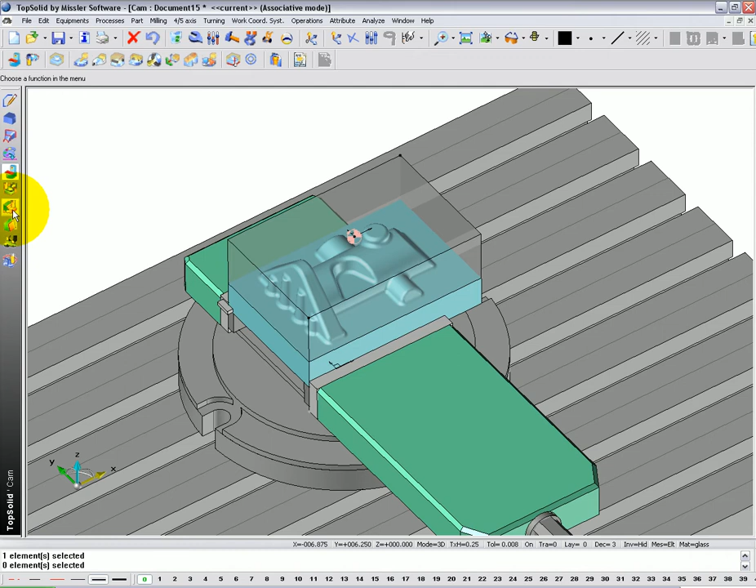In this first operation, we're going to apply a roughing routine. To get started doing that, simply click on the 3D milling icon in the navigation bar and then choose the roughing icon. Let's double click on End Mill, and here next to tool diameter, let's type 1 and hit Tab. This will filter through all the available tools and just show the 1-inch diameter cutters.

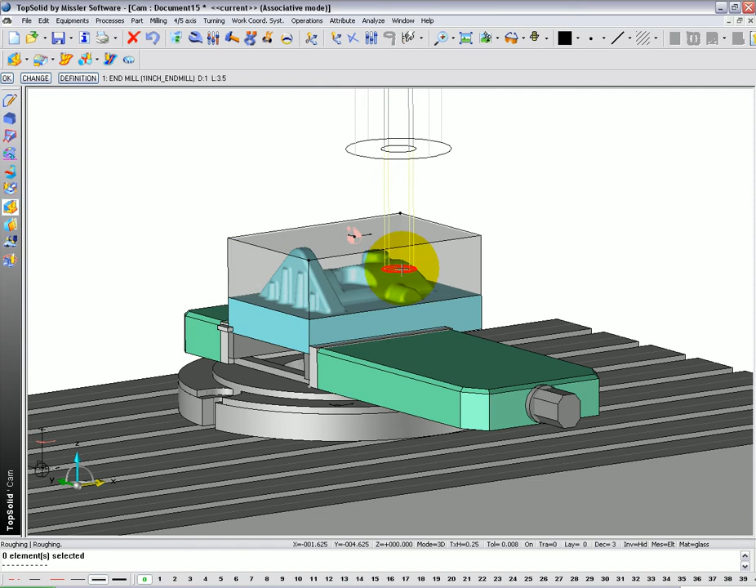Let's say OK. The first thing you'll notice is that you'll see the tool walking around the screen following your cursor's motion. This is a simple test that you can run to make sure that you have enough cutter length sticking out of the holder. When you're ready, click OK.

Let's set our stock to leave at 30 thousandths, leaving a tolerance of 10 thousandths. Let's set our Z-step to 1/2 inch. Next, let's turn on intermediate pass management, and let's set our minimum Z-step here to be 0.1. Now let's go to step over and set that to 0.4. And let's just see what it does.

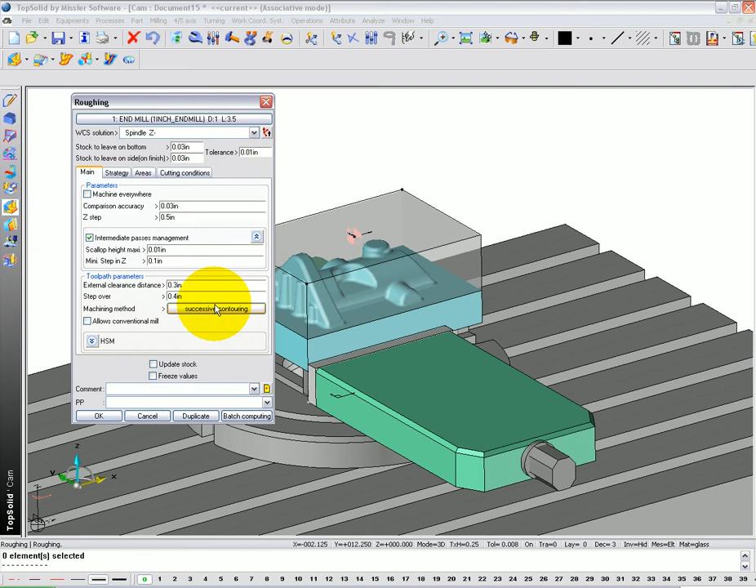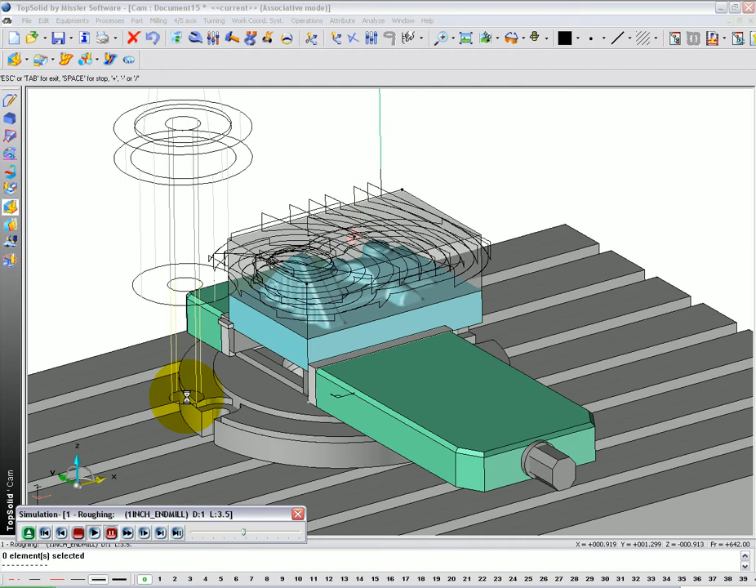At this point, you're seeing a simulation of the toolpath. You can speed it up or slow it down by grabbing this bar down here. You can also use your plus and minus keys to speed it up and slow it down, or hit spacebar to pause. When you're done, you can right-click to get out of it, or just wait for the animation to end.

Let's click on the Operations Manager and click the eyeball next to where it says Roughing. This will visually turn on the toolpath so you can see it. Notice we have our 1/2 inch main steps and then these 100 thousandths steps. Let's see what that actually does.

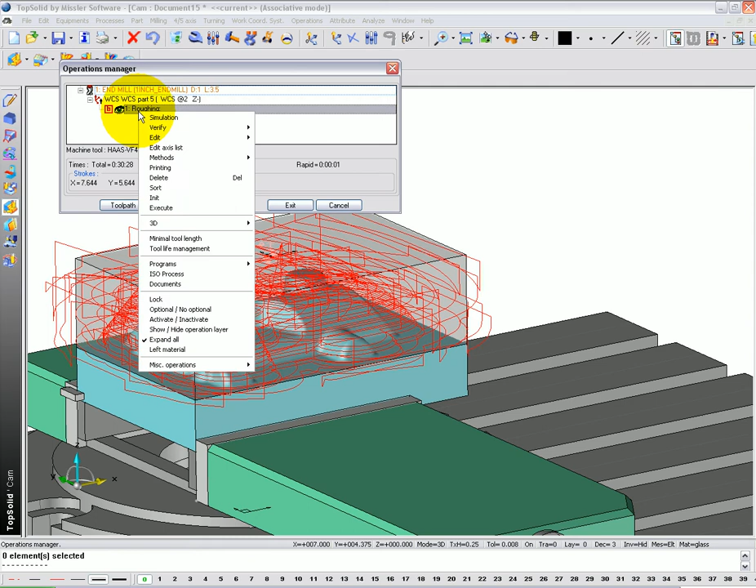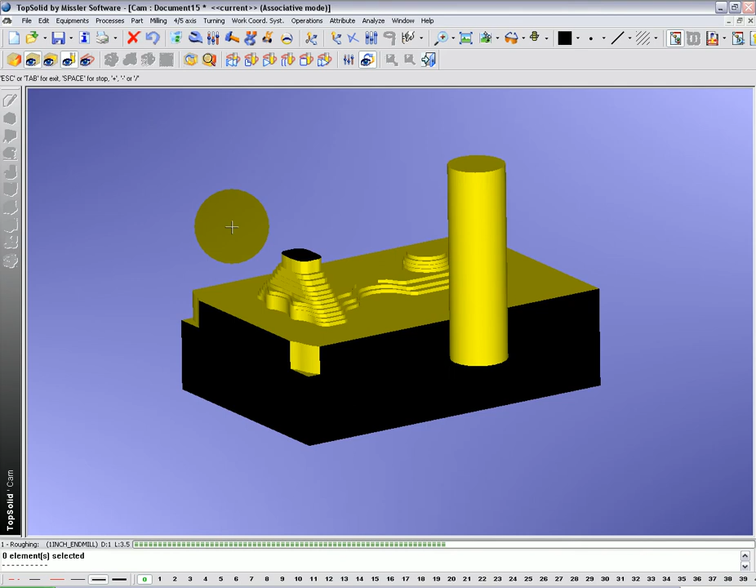Go back into Operations Manager, select the operation, right-click, choose Verify, and now hit the play button. You can also use your plus and minus keys to speed up or slow down the verification here. Notice that the toolpath is actually roughing backwards up the part after it's taken the main 1/2 inch depth of cut. This is to remove material as efficiently as possible, yet still sculpt the part during the roughing cycle. When you're finished with Verify, hit the little Quit button.

Now, let's maybe go look at the roughing operation and see what other kind of options we can turn on. To do that, just simply double-click on the operation. Here, let's activate high-speed machining. And let's turn on trochoidal loops. We're going to set our loop pitch at maybe 1/8 inch and our loop radius at maybe 300 thousandths.

And here, we're going to turn it on only when the engagement of the cutter exceeds 40% of the diameter of the cutter. We'll also turn on radius cuts here, and we'll set that to 1/4 inch. Basically what that's going to do is anywhere there's a sharp corner, the software is going to insert a fillet.

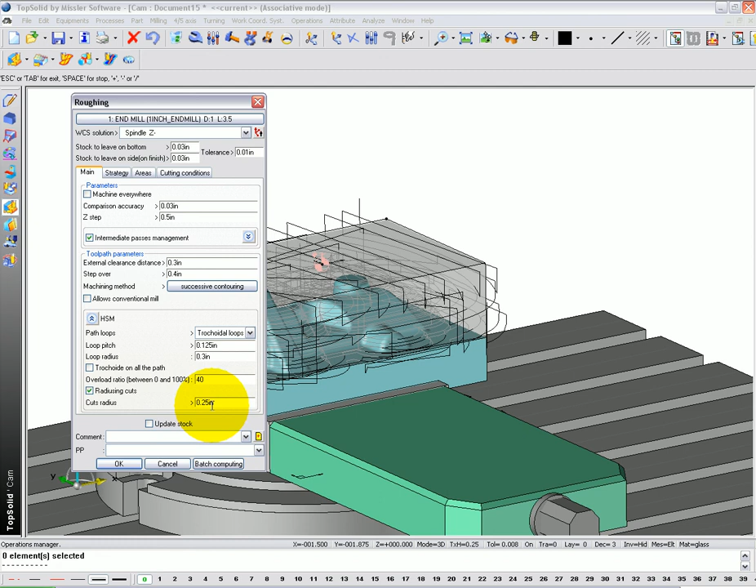Let's go look at our toolpath again. Notice all the circles in here? That's the trochoidal toolpath. And if we zoom way up here, you'll also see the fillets in the toolpath to make the motion smoother.